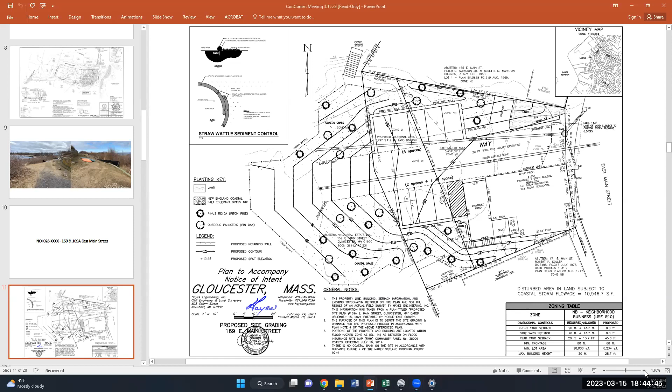Thank you, Mr. Chairman. Tony Capichetti with Hayes Engineering, representing the applicant NSD Real Estate. This site is an existing mixed-use building. It's first floor commercial, second floor residential, and the applicant is seeking to rehabilitate the building and restore the first floor to a working commercial area, and then rent out the upstairs residential use. In doing so, we looked at a number of alternatives to get ADA access to the building from the front.

We dealt with the DPW about possibly moving the curb, providing on-street handicap parking, and it was determined that was not the best course of action. So we came back, and what we're doing is seeking to adjust the grade by 3.5 feet or so at the corner of the building, so we can get a handicap accessible spot. And then once we get past that spot, we try to go back down to existing grade at about 5%.

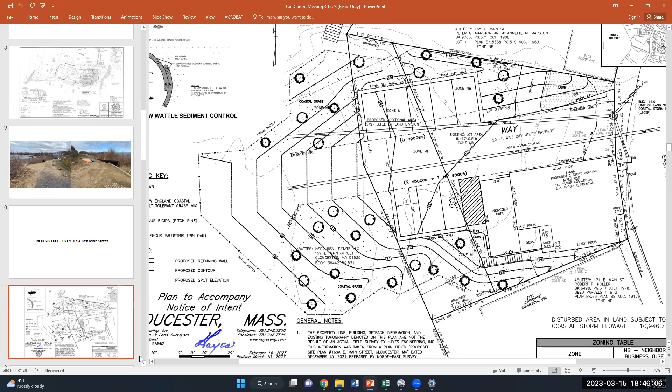It's in an existing way, and we did a site walk. The area is currently wholly impervious. It's pavement. There is some weeds growing through the cracks in the pavement, but it is a paved area. We're going to be removing the majority of that pavement, maintaining only what's necessary for the way, which also acts as a utility easement for DPW. There's a drain and a sewer that run through that. We would be adjusting the rims to grade, providing watertight sealed rims in those areas.

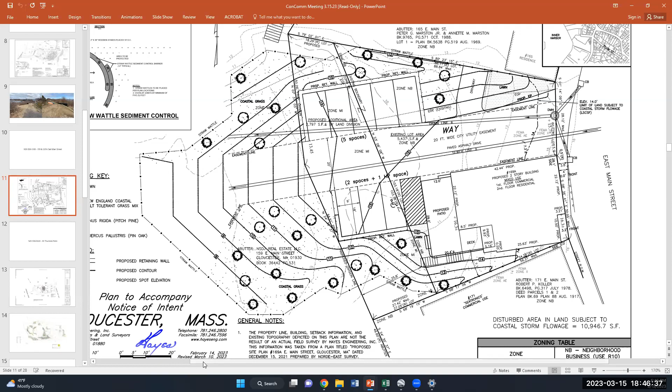And then the area that we're converting back to lawn is planned to be planted with the New England coastal salt tolerant grass mix. And we've proposed a number of pitch pines and pin oaks throughout the area because those are also a salt tolerant species, do well on the coast, to revegetate that area, which will decrease the amount of runoff coming from the site. The decrease in pavement is also an improvement within the land subject to coastal storm flowage. There is no compensatory storage requirement or compensatory storage required to be constructed because it is land subject to coastal storm flowage. It's the storm surge from the Atlantic Ocean.

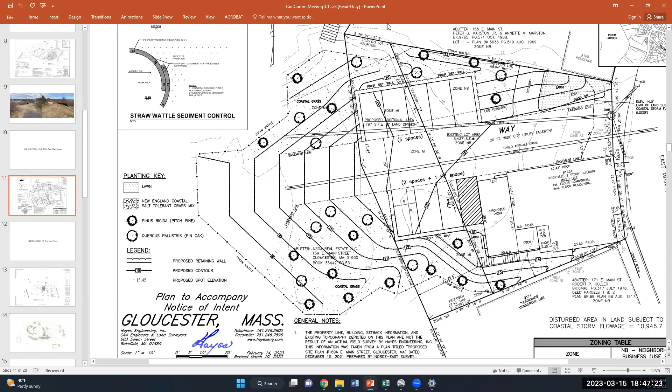We have no DEP file number at this point in time. I don't know why, we've submitted quite some time ago, but DEP has moved offices. I've reached out today to see if they've got the application, but I'd like to address any questions the board or the public may have. That's fine. Oh, now I'm gone.

You're there, just upside down. What's going on? Anyways, okay, let's open it up to public comment.

Anyone in the public who wishes to speak for or against the project may do so by hitting the raise hand button at the bottom of your screen, or hitting star 9 on your phone or handheld device. Currently we have 7 attendees and there are no hands up.

Okay, so with that, then we'll move to commissioner roll call comment. Seeing none, hearing none, we close the public comment period and move on to roll call commissioner comment.

Member Charpentier: the only thing I want to say is that the site walk was really helpful to put this whole thing in perspective. I support the project and it's too bad we can't vote on it today.

Member Cook: just what Linda said, no comments. Member Gradwell: no comment, everything's fine.

Member Sargent: Yes, I also want to thank you for a meaningful site visit. Thank you.

I'm just wondering if the chairman was standing on his head when he was at the site visit. I actually went on my own. It was, once you saw it, you understood it. It was good to see. But I did not go with the group, as you know, but very funny.

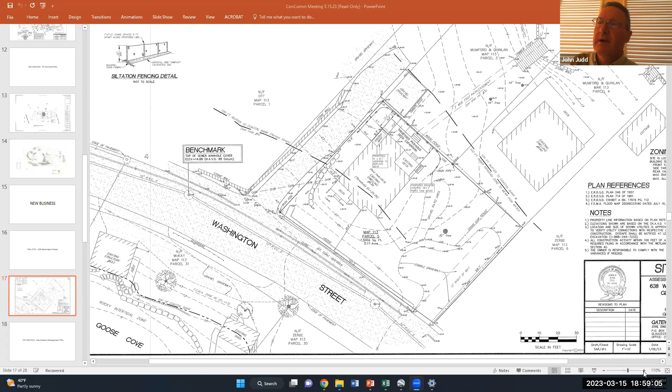Sure, Chuck, I'm not sure if you want to put that back up. You see where the cursor is, that's 8 foot by 4, right there. So that's an existing deck, that's how they gain access from the gravel driveway.

So that's what they're looking to enclose, as far as putting a roof on to get out of the weather as they come in. The deck itself, you can see the existing deck, and what Chuck is showing is the proposed expansion. Again, that's all open pervious deck.

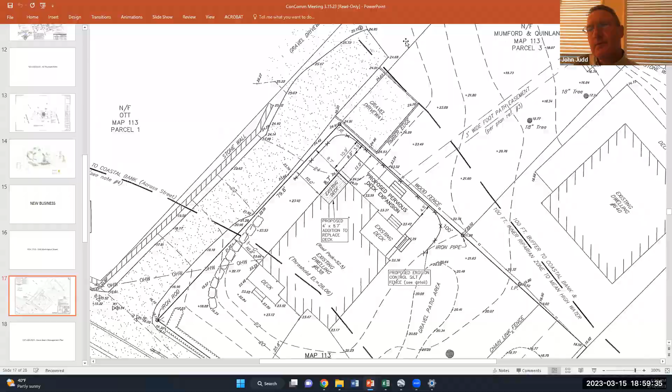Okay, well that helps explain it a little bit. Did that answer everybody's questions, or do you have more? Doesn't answer mine. How is he making the riverfront area better?

Well, I would agree that we can propose to offset that area in between the deck expansion and the property line, because that would not be accessed, to allow for some salt tolerant plantings. We can add that to the plan, or provide a planting plan, and TJ can have his landscaper provide something more suitable.

Okay, so mitigation and betterment. Yes, that would be in between the proposed work and the riverfront, so that would be a betterment.

Anything else? That would be wicked nice. Okay, so do we need to continue, or can we move this? Everyone comfortable with those?

Are we gonna add those, or do we need to get a new plan edited and resent to us for the next meeting? What's the committee like? We'd like to see a new plan.

Okay, so if the applicant wouldn't mind, we're gonna continue to the next meeting. Yes, no problem. Okay, so Anjo, if you want to continue that.

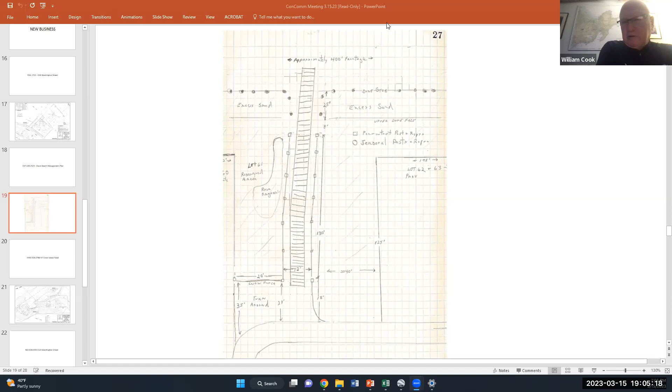I'll open up for public comment. Anyone in the public who wishes to speak for or against the extension of the Davis Beach Management Plan may do so by hitting the raise your hand button at the bottom of your screen or hitting star 9 on your phone or handheld device. Currently have 3 attendees and there are no hands up. Seeing none, hearing none, close public comment period.

Commissioner roll call comments next. Member Charpentier: This is Bill's project of always shoveling sand against the tide, and we voted on it before, so I'm in favor of it.

Gradwell: I assume that you're not using any machinery on that, Bill? Not using any machinery? Yes, we use a tracked Bobcat, to keep it low impact.

We don't actually take it down on the beach. If we do have to take it on the beach, the original plan said we were going to use a York rake and rake the beach. But we did that the first year in 2008, and then we've never done it since, because what happens is we get together just prior to the 4th of July, all the people that live down there, and we manually rake up all the dead grass and stuff, and place that at the toe of the dune also to further allow it to build up.

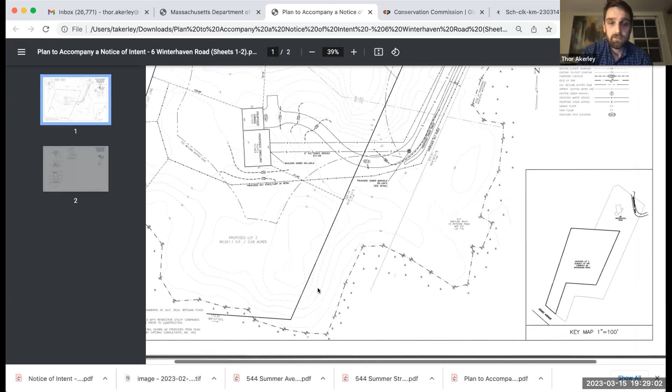Yes, I didn't mean to touch on that in the presentation, so if I can share my screen again quickly. Down here in the bottom right of the plan, you see the property, highlighted in the darker shade, does now have frontage on Essex Avenue. That was the reason for securing the additional land from the Stevens family, to create a lot that had legal frontage. If they didn't do that, they would not be able to create a lot that had enough legal frontage. So they did have to secure a variance from the ZBA to access the property via driveway, not from the property's frontage, if that makes sense. The alternative would be to have to fill wetlands to access the property. This is where you'd bring in the driveway, and the frontage is down here on Essex Avenue. So this alternative seems to be the easiest for just about everybody.

Thank you. Okay, why don't we wait for the rest of the commissioner comments and then you can respond to all of us? Sorry, yeah, thanks, that's okay, that's fine. Member Cook.

I thought I heard him say that the lot that's on the plan right now has not been approved. So I question how we can approve something that isn't approved yet as a lot, because it may be subject to changing. That's really the only question I had.

Member Gredwell: I like the idea of not filling the wetlands. Makes all the sense in the world. Everything's fine by me, thank you. Member Sargent.

I noticed that the driveway, the 12-foot driveway, the water line and the sewer extension are also in buffer zones, as in the backyard. I'm wondering how much vegetation is going to be disturbed and how much area the 12-foot driveway impervious surface is going to create. I noticed you didn't propose any mitigation for all this disturbance and impervious surface. And because groundwater is kind of high in that area, any dewatering must be adequately treated before being discharged into the wetlands or the buffer zones.

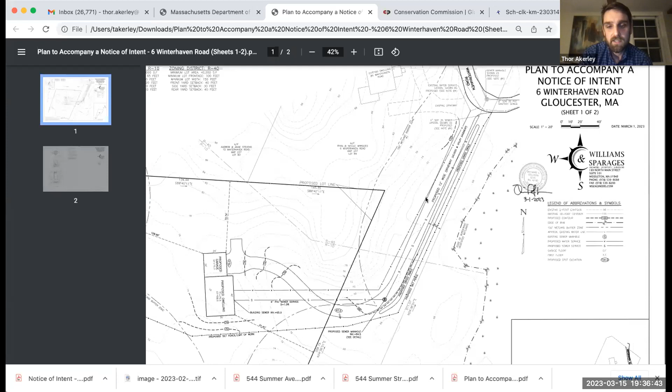And then again, as a note, if plantings are what the commission would look for, there might be some opportunity here along the driveway. I think there might be some open space down in here along the property line, but most of the other portions of the buffer zone are pretty well vegetated. The only other disturbance is back here, so we wouldn't really have many other opportunities in the buffer zone to plant, but that's something we could explore.

I have one more question. As I'm listening, go ahead - is that okay to go ahead? Sure. As I'm listening to you, you're talking about that back section, and there's going to be a disturbance over there, and you said there weren't a ton of trees coming down. Could you elaborate on that and tell us how many trees are coming down? And if you're taking trees down, what are you going to do to mitigate that?

I apologize. This area in the buffer zone back here - this is the limit of work line, and this is the 100-foot buffer zone line here. So this area within the buffer zone is proposed to be cleared to create a backyard. I don't have the number of trees. I guess I would just ask the commission what they'd like to see, or what they are used to seeing for mitigation for trees removed in the buffer zone, that feels appropriate to them.

Is the area behind the proposed house down to the buffer zone already clear? Do they need a backyard way out there? I mean, it's not a huge area, this is probably 60 feet.

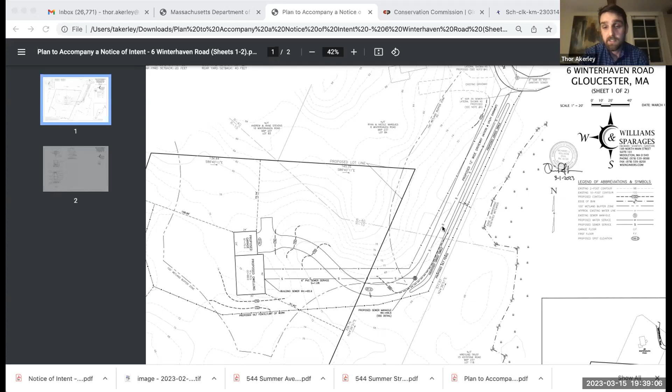This is the 100-foot buffer right here, and this is the wetland line. So all of this work is in the buffer. The house is outside the buffer, all that stuff, except for that little corner of the driveway, and the expanded backyard is the only part in the buffer.

The reason we're questioning this is we have another very big project that has been going on for a while of proposed lots, and one of the big issues is the lots have not been approved for division, and there are houses and self-contained waste systems being proposed on the lots. You're connected to city sewer, am I correct? Correct, or will be. Okay, that helps.

If you were to swing that driveway up so it was out of the buffer zone completely, and forget that extension of the backyard for the moment, I would be fine. But with this other project, I'm a little wary of approving. I'd like to hear from the agent. Chuck, what are your thoughts?

The proposed driveway is in an already cleared area. I don't think that was clear in the proposal, but when I went out there, you could see it was out there. I guess I would be curious about snow removal and snow storage. There's a way to put that outside of that buffer zone. That might be something good to see.

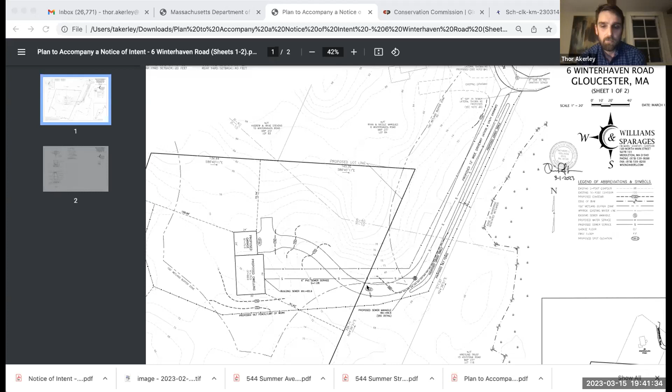I would say it would be very difficult to do that because you'd be plowing uphill to get out of the buffer zone. If Ryan's okay with it, I've seen commissions be open to using de-icers that aren't as harmful to the environment, and that can be conditioned so the commission has some teeth to not allow them on the property, if they're concerned about de-icers reaching the wetland eventually.

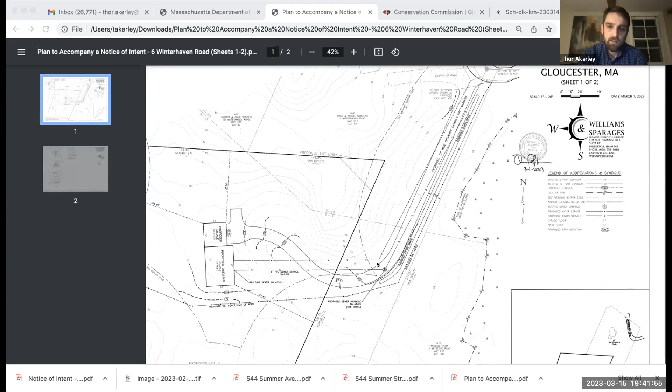Or at least maybe putting it towards the end of that straight run or something like that, where it's a little bit further from the actual wetland, down on the other side, like in here, just so it's not right next to the wetland. That's a good point. Just something to think about.

I guess I can come to terms with the proposal in terms of the lot not yet approved, simply because none of the structures on the lot itself are within the buffer zone. So we wouldn't have any jurisdiction over that anyway.

But wouldn't we normally require, if he's gonna clear trees in that section in the back where they're gonna put the yard, what we would be requiring is a count of all the trees being removed. And we typically ask a 2-to-1 replacement, and we'd like to see where you're gonna be putting those trees.

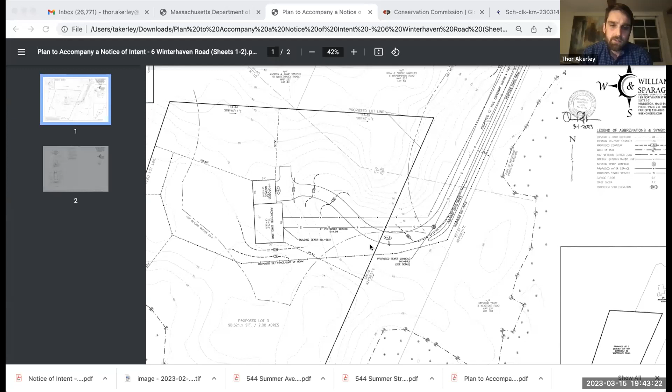Buffer zone to BVW, yes. You're right, Barry, it's that little corner of the driveway, and the extension beyond the buffer zone of the backyard that they want to clear. That's the only part, those are the only parts, and Winterhaven Road, because that also falls in the buffer zone. But as for the lot itself, those are the only two parts that we have jurisdiction over.

So it's up to the commission how they want to feel. I think if you come in with a plan providing 1-to-1 mitigation with a tabulation of the trees that are there and those that are going to be removed, that would be helpful. Can that be done? Yes, we can take a look at what exists back here and come up with an area that makes sense to plant them.

Okay, and Chuck, what is our criteria for trees? I think it's often 2-to-1 just because of potential for not surviving. The riverfront is an area calculation. Okay, 2-to-1 for impacts. And for trees.

But what is our tree size definition of a tree? If he's tabulating trees, what is our definition of a tree? What's the diameter, 6 inches? DBH, okay. I think 6 inches might be a little excessive. A varied situation going from 1.5 to 6 inches would be best for that, with the smaller trees being closer to the wetlands.

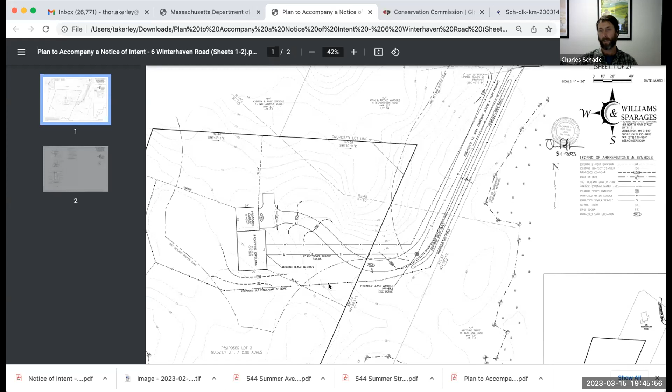Just to clarify, I was saying that a tree is anything greater than 6 inches that's existing. Yeah, I think he thinks you're talking about a replacement. Right, not existing trees. Yes, count existing trees that are greater than 6 inches DBH. And then the replacement tree would be something that has a DBH of 1.5 or 2 inches. Okay, have you got all that, sir? 6 inches or greater, I got it.

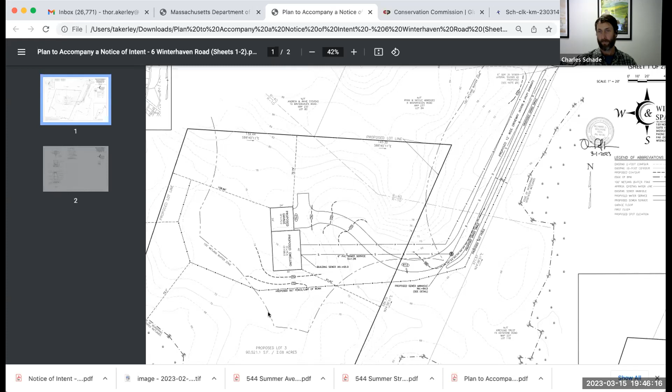Okay, and was there another question that was coming up? Did I cut someone off? I was just gonna say, possibly shrubs or other types of plants too could be used rather than just trees, to get a mix of things in there. Does the commission like to see a higher ratio with shrubs, like 2 shrubs to 1 tree, or is there a preference there?

We're basically looking to replace the equivalent of the canopy area, and we're looking to provide wildlife habitat. Okay, say no more. All right, native species, obviously. Okay, do you think you can have all this in place for April 5th? Absolutely. Okay, Linda, would you like to make a motion?

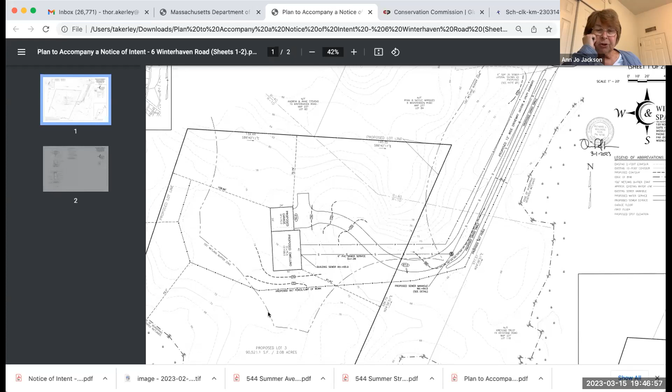Charpentier moves to continue NOI. Where are we here? 028, yeah, zero, 2911. I don't have much light over here. 028-2911 at 6 Winterhaven Road to the meeting of April 5th.

And Gradwell seconds. Roll call: member Charpentier, yes; member Cook, yes; member Gradwell, yes; member Sergeant, yes; member Sherman, yes; and member Jackson, yes. Okay, sir, thank you, I will not be at the meeting, but they will see you on the 5th. All right, we need to go back to, Rob, you don't have to come back yet.

We need to go back to NOI 028 unassigned at 40 Thurston Point. Has Mr. Dick shown up yet? I do not see him present. Okay, and did he indicate when he wanted to continue to? He did not, he was just waiting for the number to come out.

Another one for April 5th. Don't vote on it yet, Linda, this whole meeting is moved to April 5th. The Charpentier moves to continue NOI 028, no DEP number, 40 Thurston Point to the meeting of April 5th. And Gradwell seconds. Roll call: member Charpentier, yes; member Cook, yes; member Gradwell, yes; member Sherman, yes; member Sergeant, yes; and member Jackson, yes.

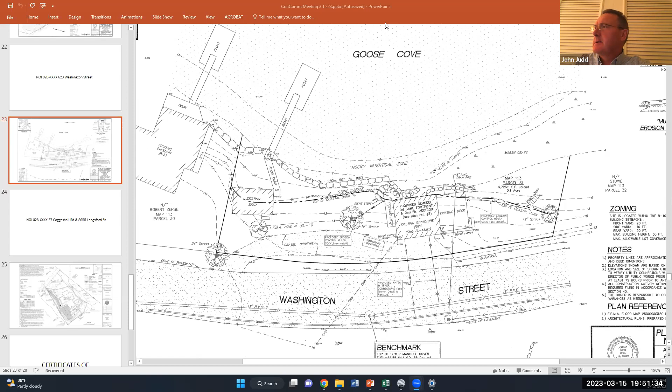Okay, first up is to get public comments. So anyone in the public who wishes to speak for or against the project at 623 Washington Street may do so by hitting the raise your hand button at the bottom of your screen or hitting star-9 on your phone or handheld device. We currently have 2 attendees and there are no hands up. Okay, seeing none, hearing none, close public comment period.

Commissioner roll call comments? Member Charpentier, no comments. Member Cook, no comments. Member Gradwell, no comment.

Member Sergeant: I didn't see riverfront checked in the application, and I was just wondering about that. I did look at the architectural plans that were submitted to the ZBA, and it did show that the second floor roof line cantilevered a bit over the existing roof line. And it also showed that there was going to be a covered porch where there's now a deck to the north. So I'm just wondering, in order to offset that, maybe a little bit of plantings would help the riverfront area with wildlife habitat. Thank you.

Member Sherman, no additional comments. Member Bella, no additional comments either. Member Jackson, no comments.

Okay, that's everybody. You can respond, Mr. Judd. Yeah, we have no issue with adding some plantings to offset. I wasn't aware of that additional covered porch based on the drawings I had, but that is not an issue.